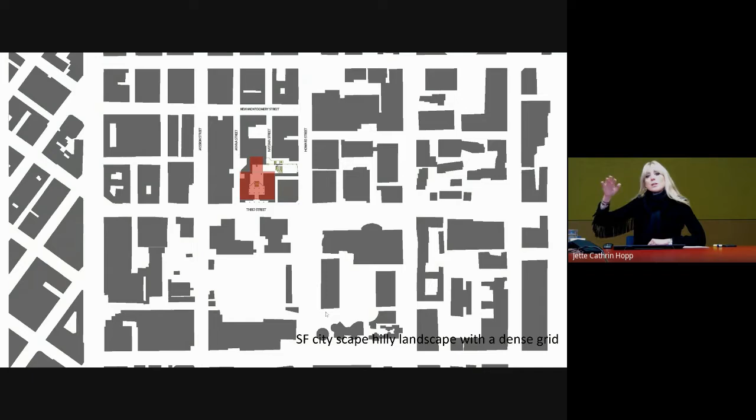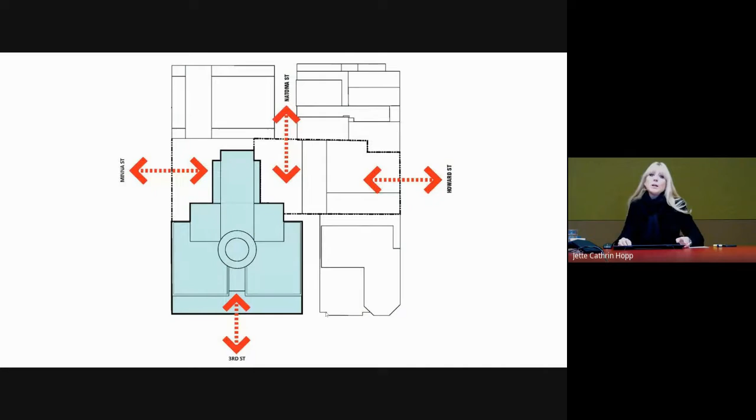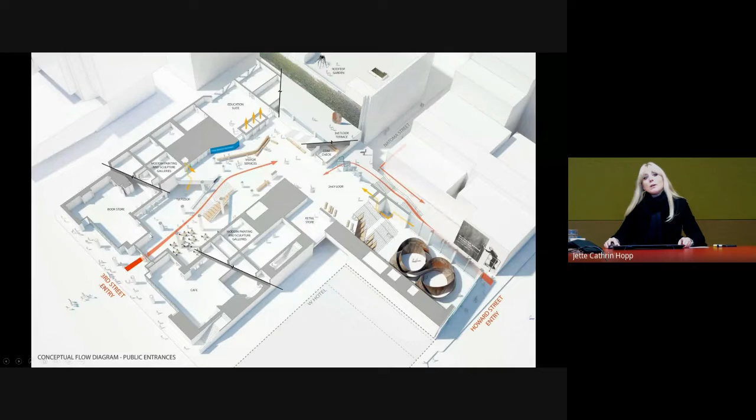Maybe some of you have been to San Francisco - the cityscape is quite a hilly landscape with a dense grid. With our building, it was really about increasing the number of entrances. You used to enter the building here before, but we really wanted to make this a part of the city grid. As you can see in this diagram, this was the former street entry, but with our new ground floor that is more like an urban landscape - because it has to connect with different height levels in the city - we have this big carpet that connects to different directions of the city and creates this public flow. This also resulted in almost a tripling of exhibition space.

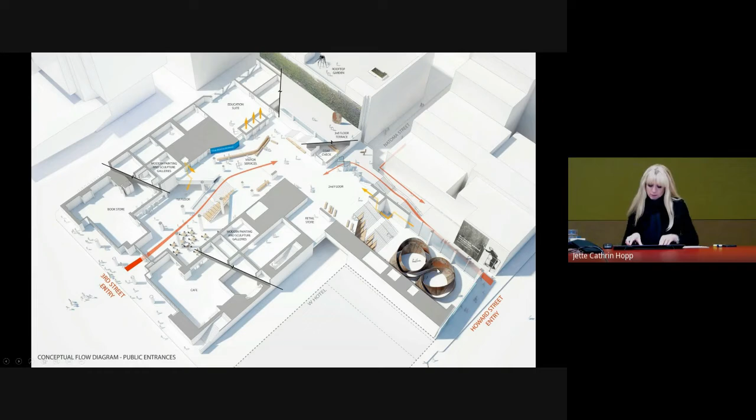Let me very quickly show you some of these new spaces. This is the link from the Botta building to the new extension, up to the second floor, where we have all the ticketing and these functions together. And then, as you can see, the different galleries for the different art exhibitions and themes.

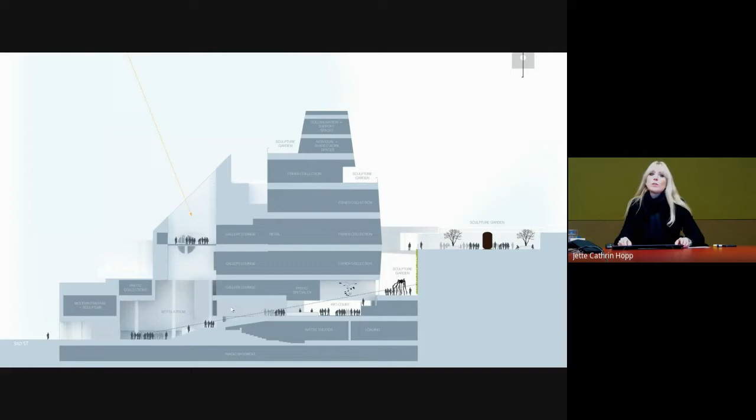I like this section very much because it explains the situation well - how the extension creates these different entry points. Also, as you can see here, the interior and exterior work together, and the new facade material is inspired in part by the waters of the San Francisco Bay. It's composed of more than 700 uniquely shaped FRP, fiberglass reinforced polymer panels, which have silicate crystals from Monterey Bay embedded in the surfaces, catching the changing light. Again, you can see this direct connection between inside and outside.

We also have these free galleries, which I think is very important - for example, here we have the permanent Serra exhibition, and it's free, not related to a ticket. The same thing you might recognize if you remember from the opera.

So it's really also going into the negotiation with the clients and the stakeholders to increase accessibility in the proper sense.

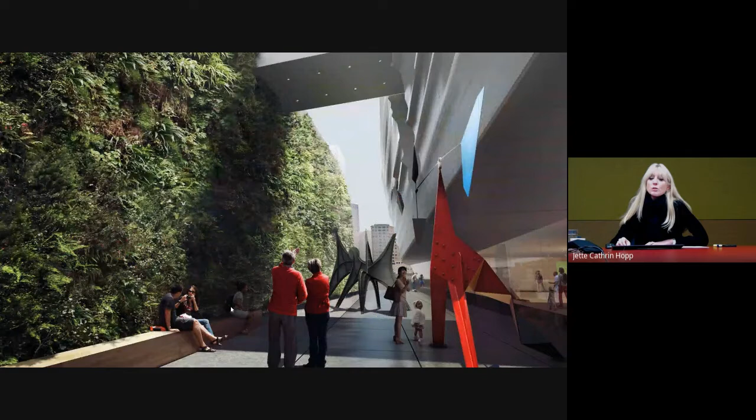Yeah, see here a little bit this connection to the vertical garden that we have here. It's the largest, actually, still I think, vertical garden in the United States, where we have all the different local species at this wall, and also directly linked here to the sculpture garden.

Another project that I've included today is the new one, now we go from San Francisco to Paris, just to have you with me on the route map.

So we were commissioned with the new headquarters for 1,600 employees for Le Monde, the newspaper. It's really a project that represents Le Monde Group's reinvestment in its staff at a time where other media outlets experience a downsizing of their newsrooms, and their deep commitment to cultivating a vibrant public realm through democratic access to information and physical space.

And as you can see here, it's located very close to the Gare Austerlitz, so it has quite a complex urban situation, both in the urban fabric, but also in terms of the technical aspects, since it's placed almost on top of a train station.

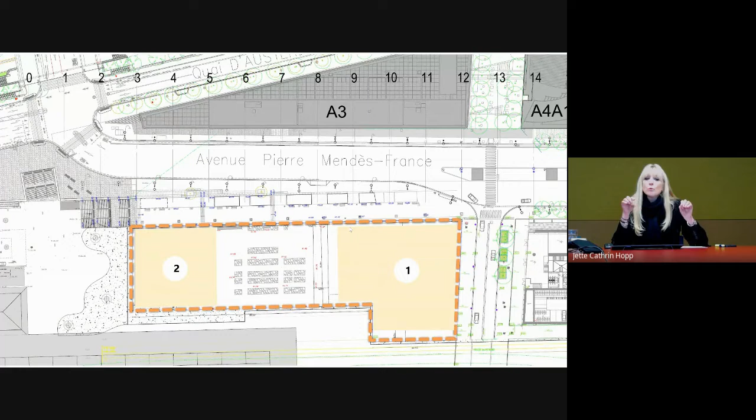So what was also interesting is the urban context, because we could only place the foundation and the infrastructure on two sides of the building, due to this close relationship to the railway. This was kind of the existing urban regulation that you can see here on the left.

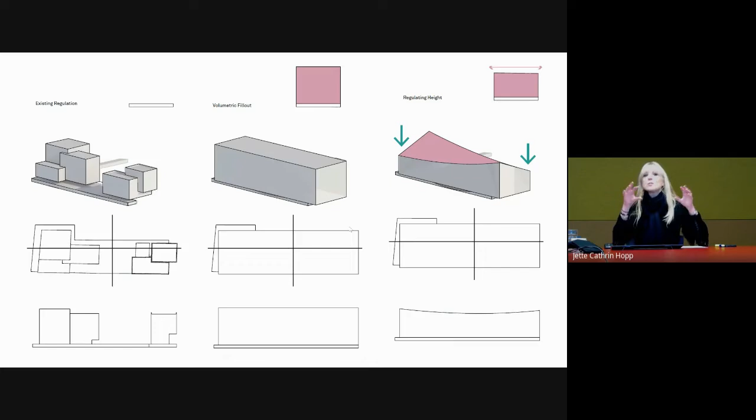And we tried, and for us it was very clear, by this distribution of volumes, the new home for Le Monde had to be one building. So we tried to reinterpret the current regulation and the technical possibilities.

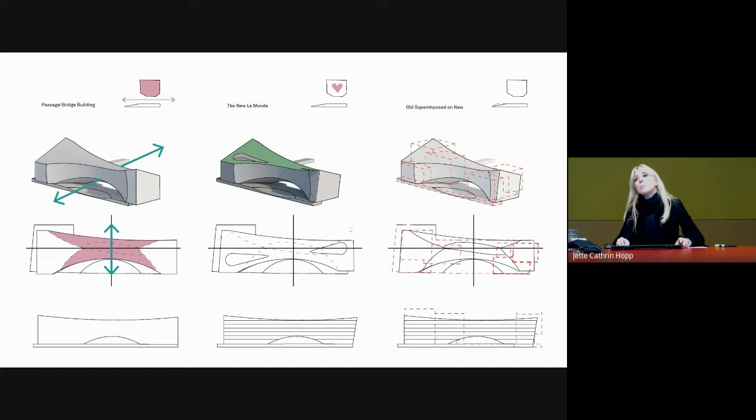And what you can see here, with the superimposed diagram on the right side, we really tried to create this kind of bridge, so that on the one hand the building is bridging, creating this public plaza underneath with the activated surfaces, but also has this kind of distance viewing to it.

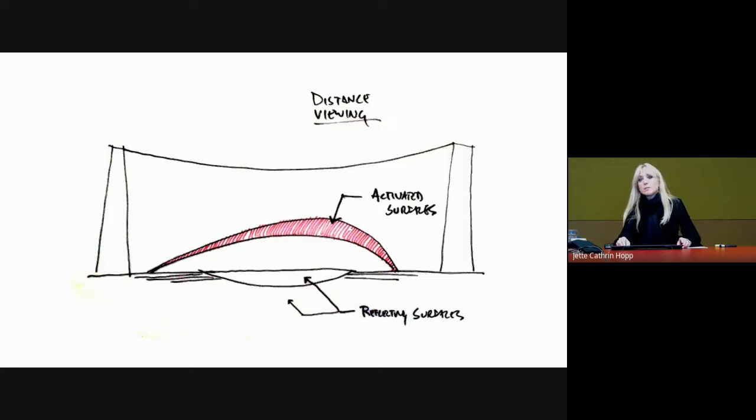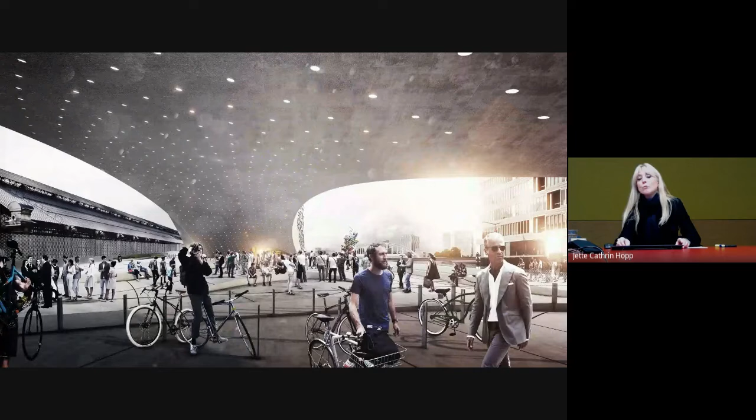So this was an early illustration from the competition, but you can really see how this building also acts as a connector within the city fabric.

And also, the exterior of the building we envisioned clad with a pixelated matrix of glass with varying degrees of transparency. This is a ground floor plan where you can see the different infrastructures, the cores, how they come down, and how this plaza situation connects to the railway station.

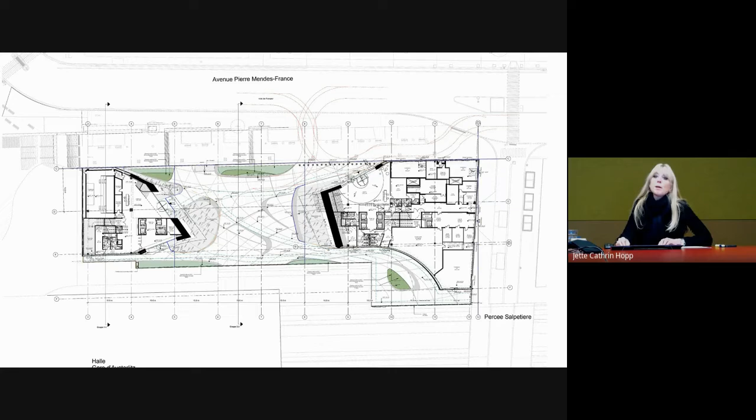And this is the built result. So you can see it's really close to the competition entry, which actually applies to most of our projects.

Because, now I'm taking a detour to the conceptual finding: when you really create this kind of strong concept for your project, then you have also this kind of robust point of departure that also allows you for transformation, but still not losing the original idea of a building.

So this also applied, for example, to Le Monde. Again, this pixelated facade also took a little inspiration from the media world.

And here, just to show you a little bit the buildup of the building, it's really quite a heavy steel structure that is kind of bridging. It has the weight of the Eiffel Tower.

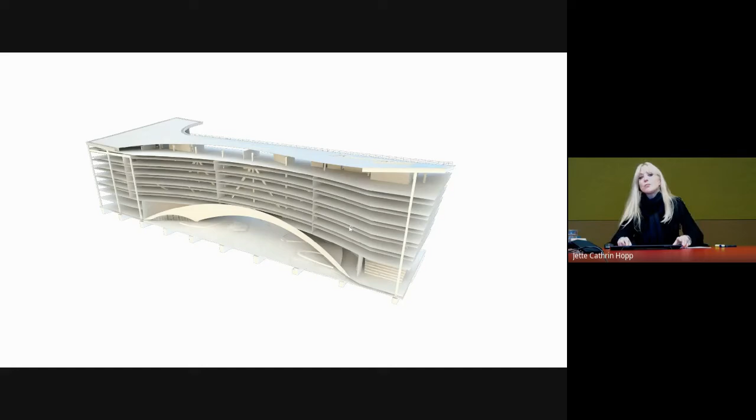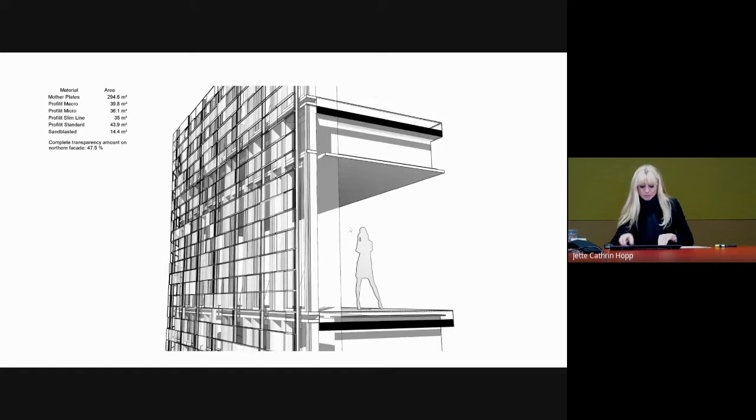So just to give you a little bit of an idea of the span and the different layers of glass, as you can see here, and also the different transparency, translucency, and opacity that we work with, just to create this continuous surface.

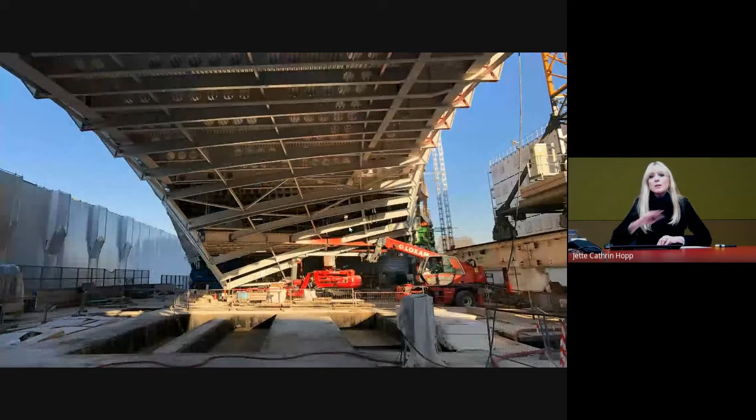And also we have these public terraces on top of the building, so again this inviting character. And what you can see here is an image from the building site, the big steel truss that is bridging, and the built result.

Also, the outdoor area was quite important to have this inviting gesture under the building, and again the glass facade, very much linked to the competition entry idea.

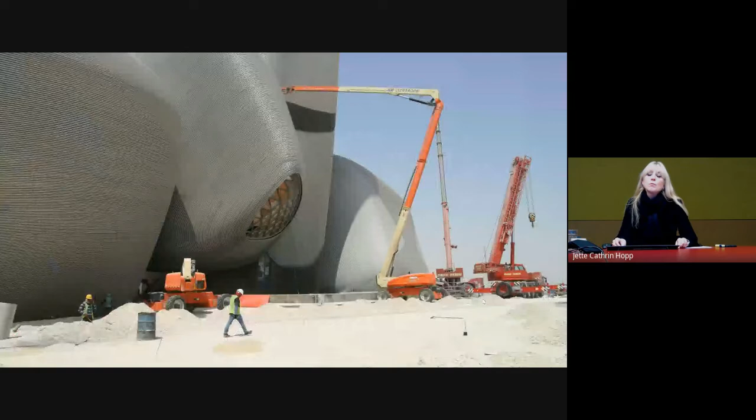It was also about working in that context as a woman—we were mostly women actually working on the project. At one point, when we came down to work on the building site, they said, 'what's wrong with the Norwegian men?' So it's really about impacting not only the project itself, but also working within those social environments.

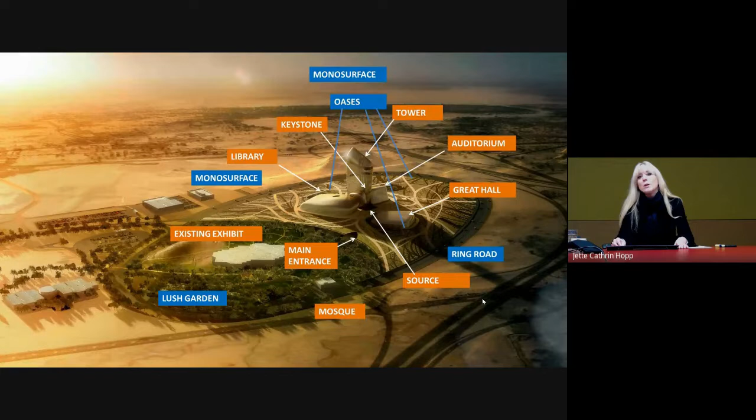Just to give you an overview of the different components—here you see a plan of how the different programs relate to each other. They are linked together by a plaza, and here you see the entrance, with all the different entrances from the museum, the theater, and the library gathered from that plaza. There are some inner courtyards within the different pebbles, as you can see here, or from the theater, and the landscape on top of the monosurface, as we call it.

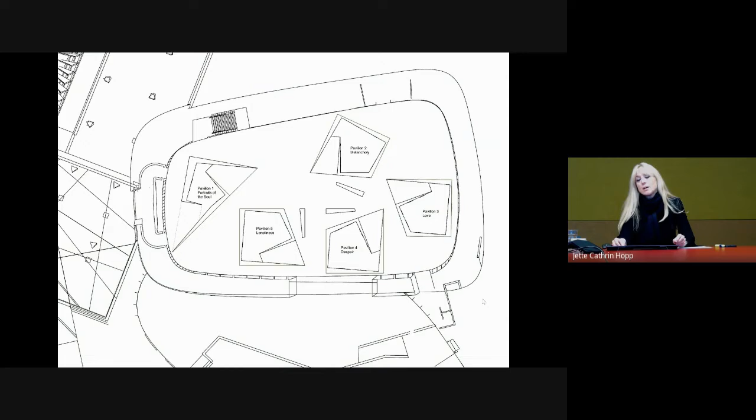We were also commissioned with an exhibition design within the museum part of the project. I don't know how many of you know the Norwegian painter Edvard Munch, part of the Expressionist movement—many of his motifs you wouldn't think possible to exhibit in this social context. But we designed these pavilions within the big museum space, and for the first time it was really possible to exhibit Edvard Munch's paintings here in Saudi Arabia. It's very subtle, but it's really about impacting social change, because this exhibition would never have been possible without the building—it's being part of a larger journey.

From one context to the other, I take you back to France, a project we worked on within Lascaux, the International Center for Cave Art in Montignac. What is this project about? Again relating it to the accessibility of culture—this area in Montignac in the Dordogne, France is really a mecca of prehistoric findings. It's on the UNESCO list and has a high density of prehistoric caves.

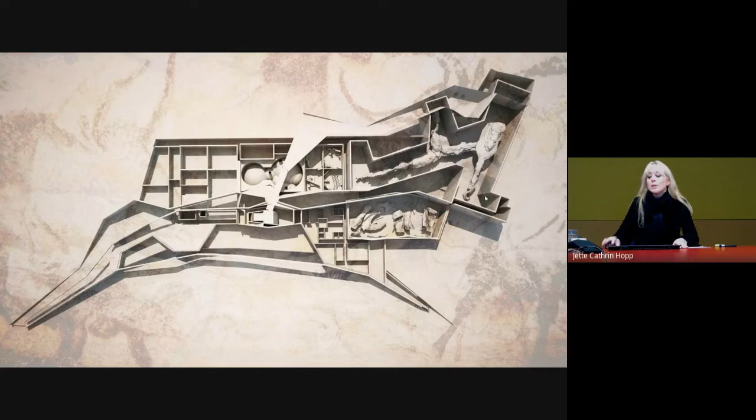This gives you an idea of the complexity of this program. You can see it contains the artificial cave, which is based on a very precise scanning of the original cave with 1 millimeter precision. This is a 3D model done by one of my colleagues.

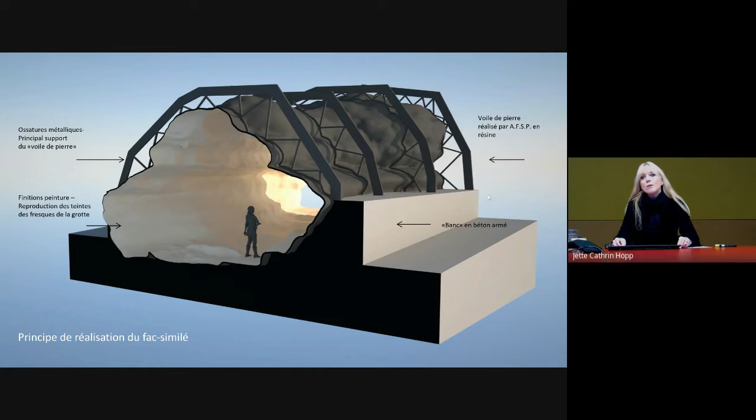It also requires high technical competence to make this into a building, so to say. You can see here the build-up and the construction side. What was also very interesting is that 25 artists spent 2 years hand-painting 900 meters of these resin rock reproductions, recreating 1900 paintings. Also interesting, through this very precise scan we discovered a lot of traces that were not visible before, so it's also a kind of contemporary piece of art.

I'll lead you a little bit through this visitor experience. You start by approaching the building, then you're taken onto the roof where you relate yourself to the context, and then taken down into the building. It starts with the experience of going into the cave, where the temperature drops down to 16 degrees. It's really about having the physical experience of the cave, even though it's a replica, to get a sense and understanding and connect you to this part of human history.

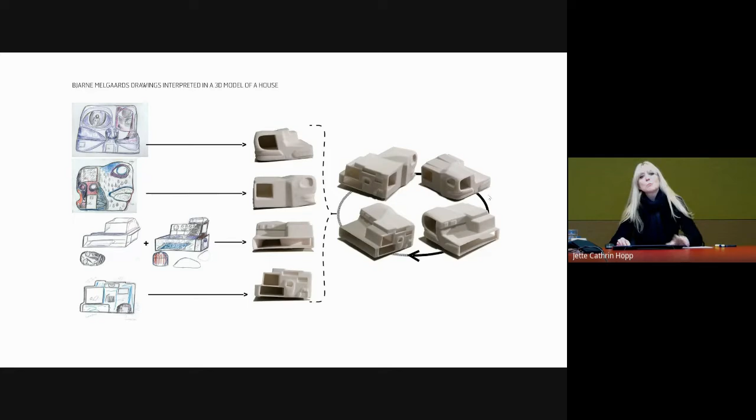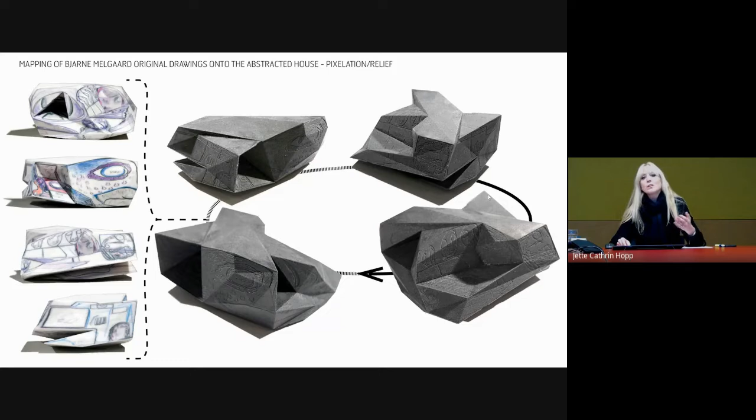The typology that we ended up with was really very close to this thinking, so we never knew what would come out in the other end. This is the typology - it's really one of a kind, I have to say.

Interestingly, this is also located here in Oslo, and this site is very close to the former atelier of Edvard Munch, the artist we exhibited in Saudi Arabia. There was a lot of protest against this project because there's an artist colony close by, and they didn't want to have this House to Die in their local neighborhood. Also very interesting - from a stakeholder group you would expect more openness, but they were actually acting quite conservative to this initiative.

Just to give you an idea of the surface treatment of the outer facade, this shou sugi ban that we use, a Japanese surface treatment of wood where you burn the outer wood and then get a kind of weather protection to it.

This was a mock-up that we have at the ICA gallery in London together with his art, as you can see. So it's a kind of total artwork, so to say. And these are some illustrations of the building here in Oslo.

We will see if this ever gets built, but we already have some offers from Austria to bring the building here and there, so we will see. It's a very experimental approach, as you can see, but very interesting especially in terms of the unpredictable process and also what it leads to as a result.

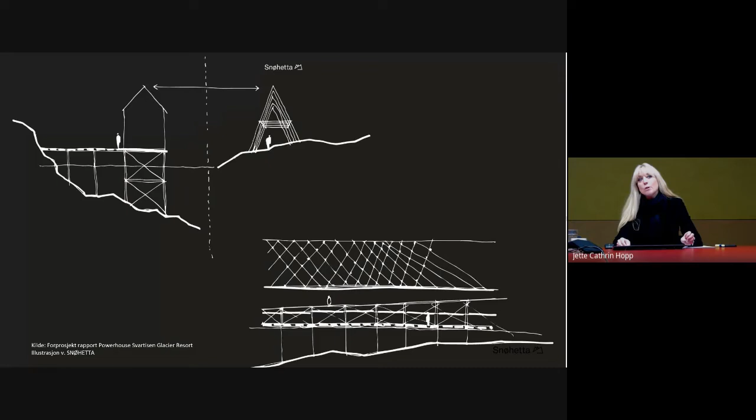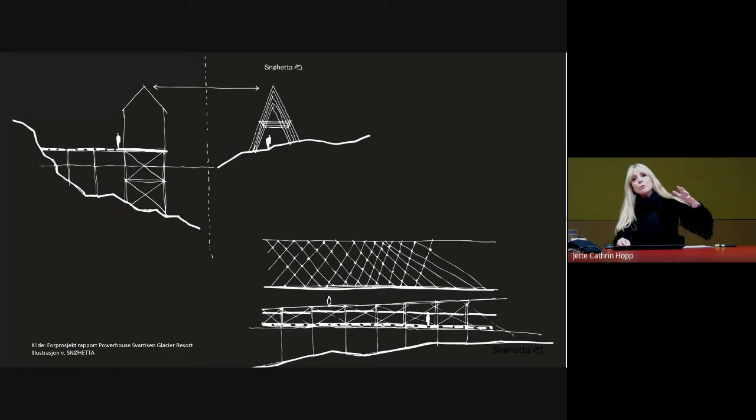So we're looking at different animal species, as you can see, the crab, an animal that lives both on water and on land, and also on local building traditions, as you can see at the fishermen settlements that we have along the fjords, that are wooden construction, also these dry fish wooden typology that we have, especially in the north of Norway. So it's again, inspiring into this typology that we developed here.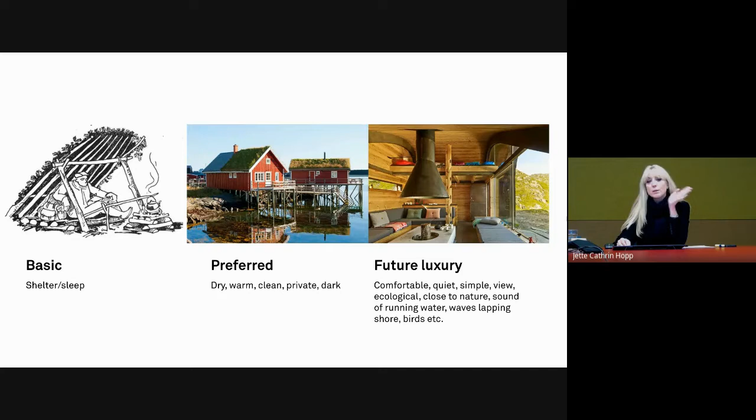And when we look at these typologies, it's not only about the programmatic approach, also considering all the different parameters that have to do with the hotel. It's about, for example, the tourism, the shelter. What is discussing future luxury, for example? What does it mean for our development? Also, when it comes to the food culture...

What are all the different kinds of topics that are related here. And when it comes to the hygiene, what does it mean for our project? So really changing also the consciousness of the different aspects. It's not only about the building; it's really about the whole environment around it.

And also, for example, when you look at the energy consumption, that we benefit from this 24-hour cycle, because most of the day, tourists will not be in the hotel. So how can the energy concept benefit from that, for example?

So these are all aspects that are kind of informing the form-finding process. It's not something that you can do as an architect alone. You really are dependent on the competence of the other team members in the group, the engineers, for example, because it's really about that all the decisions that you are taking are measurable and are impacting the final energy concept again.

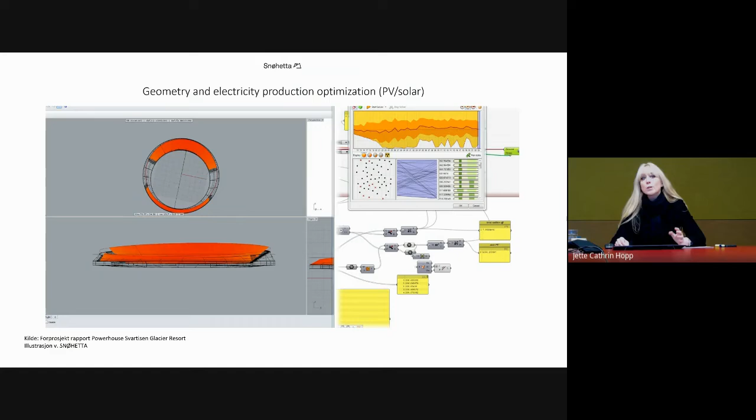So for example, when we optimize the form according to solar harvesting, as you can see here, it also requires quite a complex digital competence in order to inform the design process with different aspects. It's not a question of beautiful and ugly anymore. It's really about hard facts, so to say.

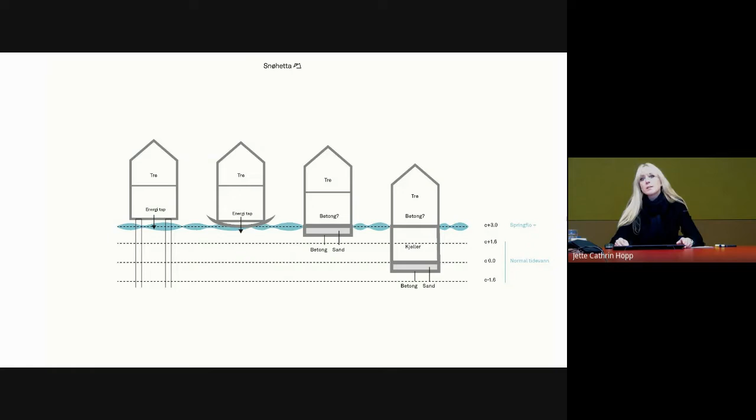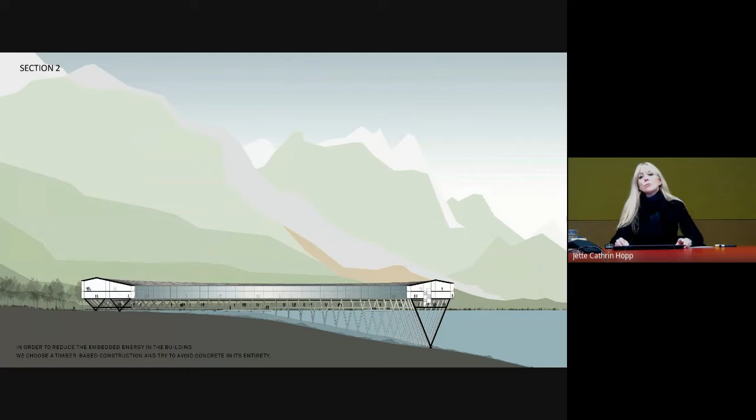Just to give you an idea of the site plan here, and also when we discuss different foundations—this is now in Norwegian, but it's really about how, of course, concrete has some aspects that are good, for example, as an energy storage, but we really wanted to make a building that was entirely built of wood, also to reduce the CO2 footprint of the material balance.

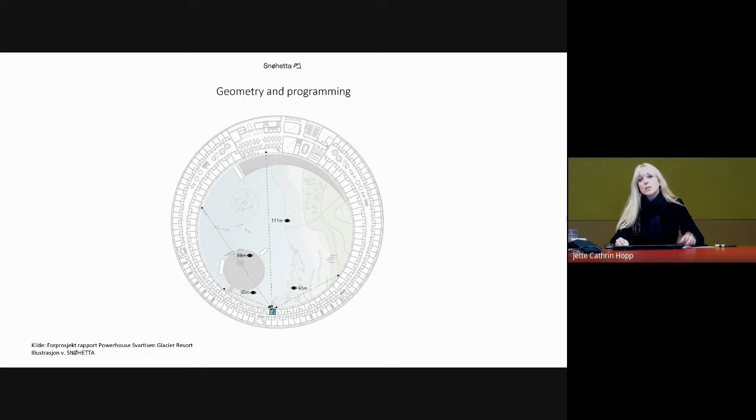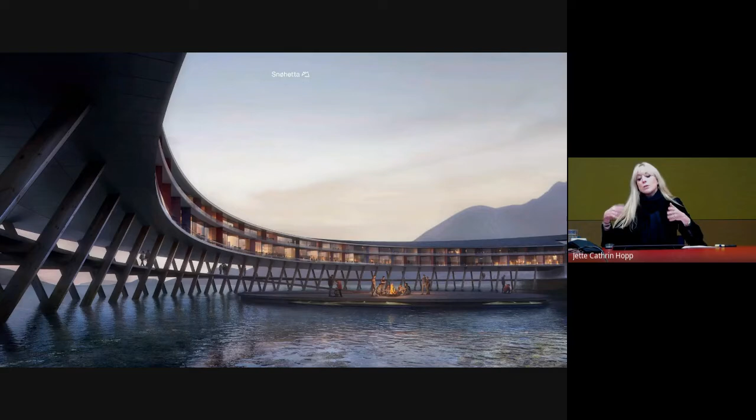And also, again, when we worked with wood in this kind of quite challenging environment, because we had the water coming up and down, so the treatment of the wood, the type of the wood, and also that it's kind of robust over time, because we, of course, want to avoid having to replace building components—even though this is calculated within the overall embodied energy. I forgot to say that we measure over a period of 60 years, and of course a window might have to be replaced twice. So this is then counted double into the energy calculation.

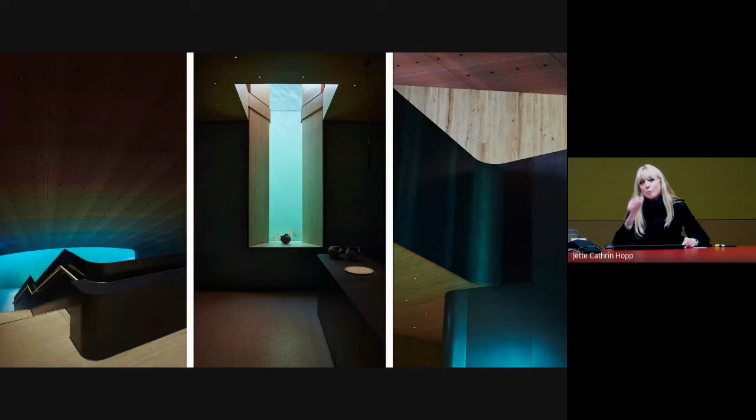Within this building, we designed basically everything from furniture to textile. As you can see here, we were allowed to work with this acoustic fabric for the transition from above land into the water, working with this kind of gradient. So really to have this journey - imagine it's 5 meters underwater, but I don't remember exactly how much above water - but really to enhance this experience of the transition from above land to underwater.

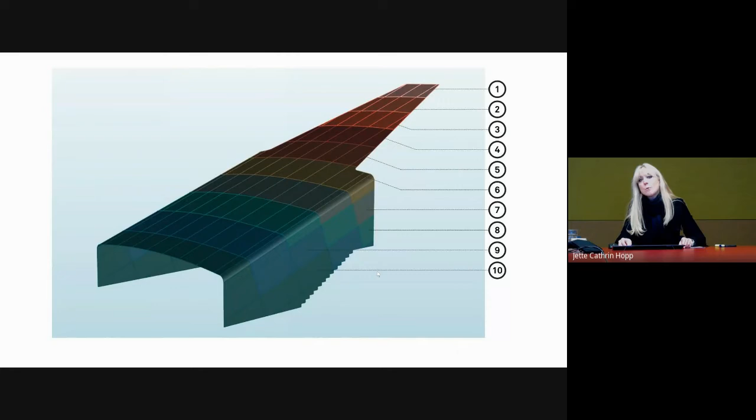So for us, this is quite important to be able to work holistically, especially when we work with a destination development like this one, where everything is linked together - the physical environment, but also all the visual communications accordingly. Just to give you some ideas how we work with the fabric, with the industry partners, the gradient that I spoke about before, developing the color palette but also the fabric itself.

So this is really custom made fabric. And since this is located in the south of Norway, where we also have a lot of oil industry and building industry, the competence related to it was used in the execution of the building. Without that competence, we might not have been able to build it at all. So it's really about the synergies within the Norwegian building industry, as you can see here.

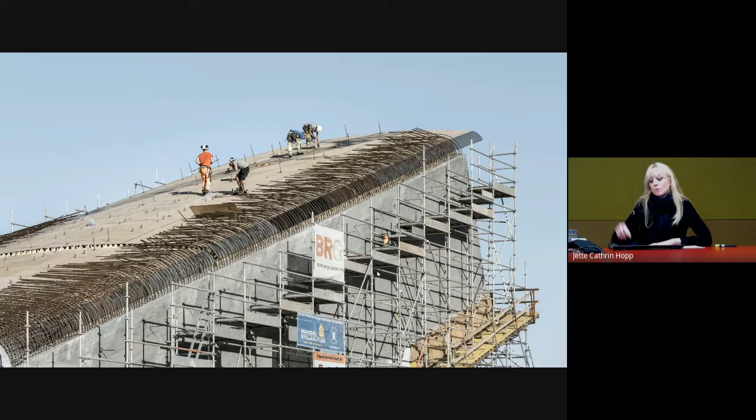Again, earlier the opera, the reindeer pavilion, and here also the oil industry and the transfer to building industry. I want to end up with this image, and thank you very much for your attention. I hope it was a good contribution to your learning environment.

Thank you very much, Jette, thank you very much. It was extremely interesting. You provided us with such a big amount of information that we are really kind of wow. Now our audience has the opportunity to ask some questions.

As always, I will use my position to ask - perhaps it's not a question, it's more of a thought. Nearly the whole lecture I was thinking about the relationship of architecture and nature, and the heritage included in nature but also in cultural heritage, like the example you gave of the beautiful project in France regarding the cave paintings. What is the right way to do things - to keep people outside these very precious locations and build a replica where you can touch something but are excluded from the real site, or to let people enter the real site, as you did with the reindeer pavilion, or the underwater restaurant, or even this new hotel design which really touches untouched nature.